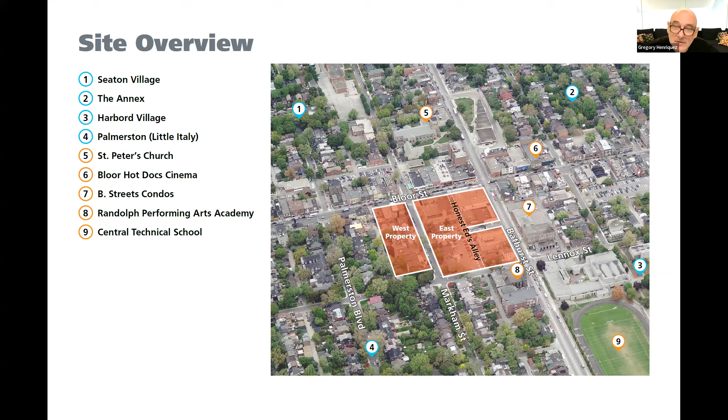Everyone on this slide probably knows the program is the corner of Bloor and Bathurst. It encompasses really 3 city blocks, with little fragments of holdouts - there's a little house on the edge of Lennox who decided they didn't want to sell, and then there's one little building in the middle of Bathurst between Lennox and Bloor Street who decided they didn't want to sell as well, and they were left out of the proposal, the project. The existing site has a history which runs deep within the community of Toronto.

It dates back 100 years, to the evolution of the Mirvish family's business, which became Honest Ed's over time, and evolved from a series of small houses to the sort of Las Vegas-looking signage you see behind you. He had passed away by the time we'd started the project, and I was lucky enough to go into his office.

And you go into his office, and it's a massive office with framed letters from every pope that has been around during his tenure running the business. It tells the story of an immigrant family who created this business for immigrants and for people who first came to Toronto to buy their wares. It was an affordable place for people to get things, and its story resonated with the community, and its loss was significant, but the reality of the retail situation in the world...

It had to go. It sits in a very interesting location between four different neighborhoods: the Annex, Seaton Village, Palmerston, and Harbord Village, and each had their own community organizations for us to deal with. It was a very grassroots process.

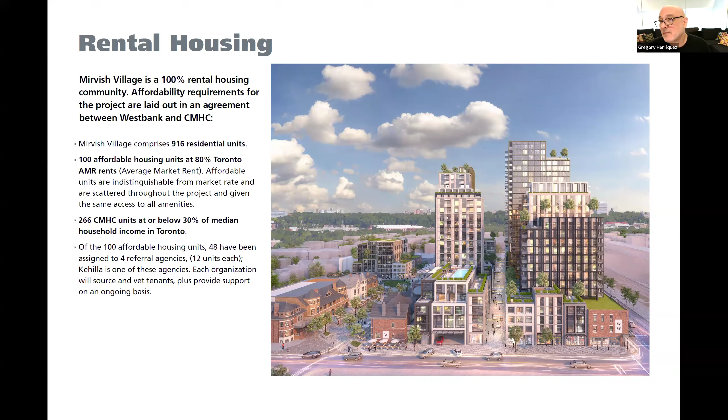Then over time, through CMHC financing, we were able to get 40% of the housing to be affordable housing, at different levels—one at 80% of AMR and others at 30% of the median household income. We're very proud to say that's probably the first time a developer put forward something like this in Toronto of their own volition.

The public consultation process involved not only going in and talking to people in the neighborhood in their homes and with community groups, it also had large public presentations, which we did. And Gregg Lintern was very complimentary, saying this is probably one of the most genuine engagements that has ever occurred in Toronto that he knows of.

And Mike Layton, a former councillor, was also very complimentary. I think the thing that I want to stress in terms of public consultation is that architects often have a design before they start public consultation, and the fault in that is that somehow you're trying to sell someone something.

Our philosophy, coming out of Vancouver, is to understand, as part of that work, what is it that makes this space special to people, and what are the things they need to maintain—things that can serve as metaphors or something to grasp onto that will allow everyone to make sense of this change in density.

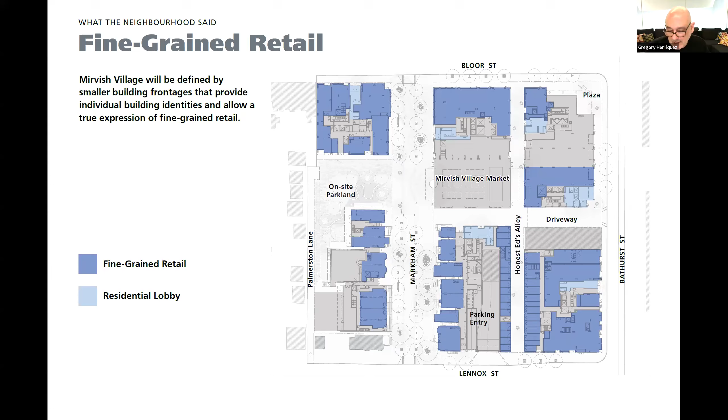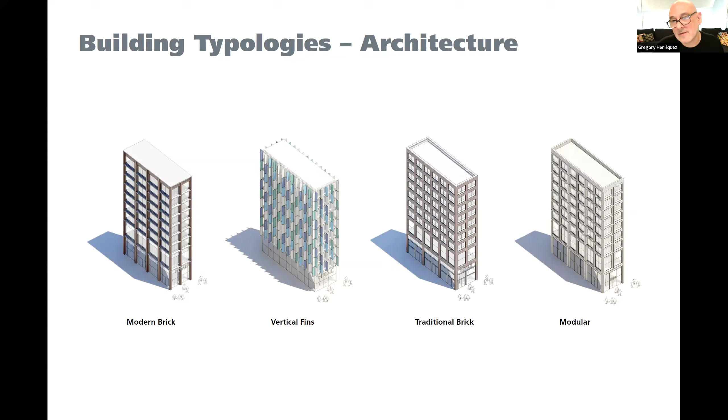We came up with this typological kit of parts where we make these little buildings and put them together to make larger buildings, and we started to work on the site. At the same time, we developed different architectural styles, because we figured if it was going to be like Tokyo—where you had all these little buildings happening over time on small sites—we had to do it all at once. So we had to create a whole bunch of typologies and develop our kit of parts.

I then went to my staff, who are used to doing 3D printing and fly-throughs and all sorts of things.

And I said, I don't want to do it this way. This time, I want to do it out of wood blocks. I just can't imagine designing this any other way. It took forever for them to make me these blocks, and we created these blocks, and everyone got to make their own little design. But the essential elements around it were the same. They were all made up of these same 33 little buildings that added up to 1 million square feet.

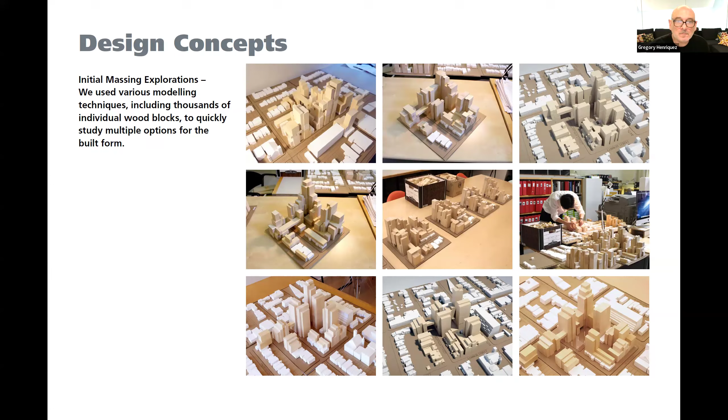How it ended up being shaped was the result of the confluence of how to get it approved, and the planners struggling with how do we deal with this kind of height in a place where our height limit was supposed to be 6 to 8 stories along Bloor and Bathurst Street.

The way we ended up rationalizing it is one of the principals in our office, Sean LaPointe, came to me. He says, there's this guideline within the Toronto bylaws that you need a 45-degree angle of daylight out of every single family house, when a larger development sits beside it. He says, you see a lot of these little steps in these little street wall buildings all over Toronto, and maybe we can apply it to this site.

So we cast these 45-degree angles all over from every house, and this is the shape and form of the density that resulted from the 45-degree angles. It also resulted in more density at the corner of Bloor and Bathurst, and the building stepped down.

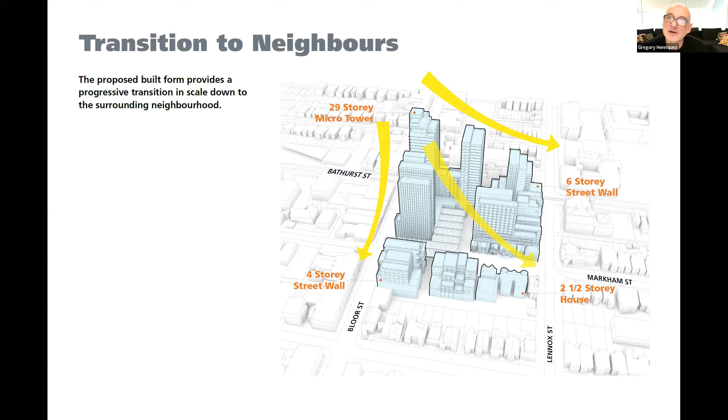What you see in front of you is really 5 or 6 large building blocks that are divided up into multiple building blocks, which becomes the little micro city which we developed.

This is one of the very first models we built afterwards, trying to make sense of it all with all the different typologies. This ended up being a little more density than we ended up getting in the end of the day, but it gives you an idea of the process we went through in order to design the project.

It's a direct result of the community's desire to have that intimate streetscape, and a trip that I took to Tokyo the day after I got the design brief as well. So there's the confluence of this local values and this experience I had, which the architect always brings their own story as well.

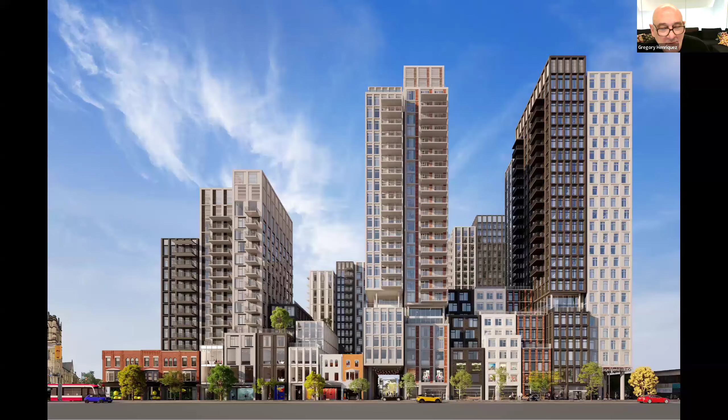And what happened over time is the project became very expensive to build. If you can imagine building 33 little buildings, all with different envelopes, all with different sort of aesthetics, it's very hard to imagine how it would turn out.

This is a view along Bathurst, sort of an elevational view. You can see the little heritage buildings on the left, a couple little stragglers in the middle. Actually, in the end, there was only one, but we left 2 facades, 2 buildings there.

What happened is we came to a point at which the budget wasn't working. And I said, well, why don't you let me try and do it the whole thing out of precast? So we met with Res and Global, because you have an incredible precast industry in Toronto that even ships to New York, and we don't have that in Vancouver.

I thought this would be fascinating. Maybe we can develop the kit of parts using only precast. So what you see in front of you now is the redesign of those typologies with precast elements only. The entire skins are done by Res and Global together, both of the two large precast companies, because neither of them could do the whole thing.

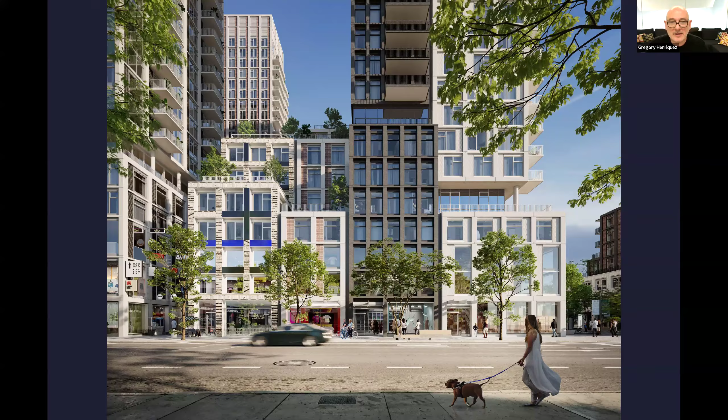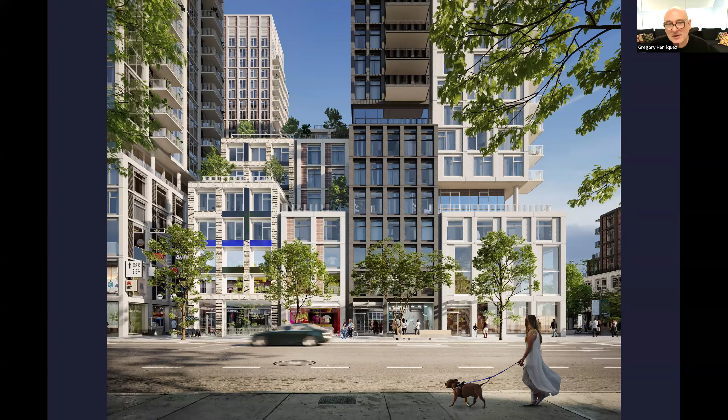In the end, what you get is a texture and scale which tries to emulate the idiosyncratic evolution of a street over time. While it is one project and there's no way you can get around that, we hope in the course of time, as the retails develop and it gets inhabited, you'll start to see a diversity to the experience along these streets. On the far left-hand side there's a little building that's a collaboration between us and Ian Wallace, who is a famous Vancouver artist.

The other part of the project, which was really special, had to do with the curation of the public realm. We have a very enlightened developer in Westbank, Ian Gillespie, who takes a lot of care and detail in the projects that we work on with him to make something that will be a unique retail experience, but also something which the community would be part of.

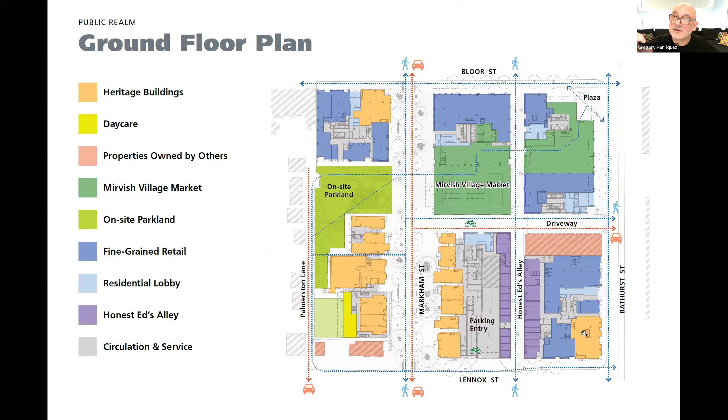We have an on-site park. We have all the little houses that are being saved and developed into little restaurants. And along both Bloor and Bathurst, there's small scale retail spaces, which you can see here. This is a view from above.

Part of the public realm concept is to remove the typical streets being pulled through in terms of the asphalt and concrete paving and sidewalks, and put small pavers, concrete pavers in different patterns like raindrops throughout the entire thing, and only allow traffic in one direction, one lane for drop off, making it really a pedestrian environment. So we have a mid-block connection through to Bathurst. We have a connection from Lennox going all the way up to Bloor Street, and Markham Street itself becomes spilling out with all sorts of retail and restaurants in the fullness of time.

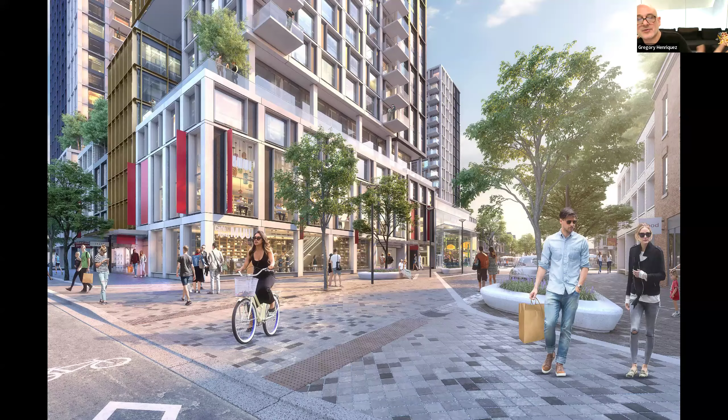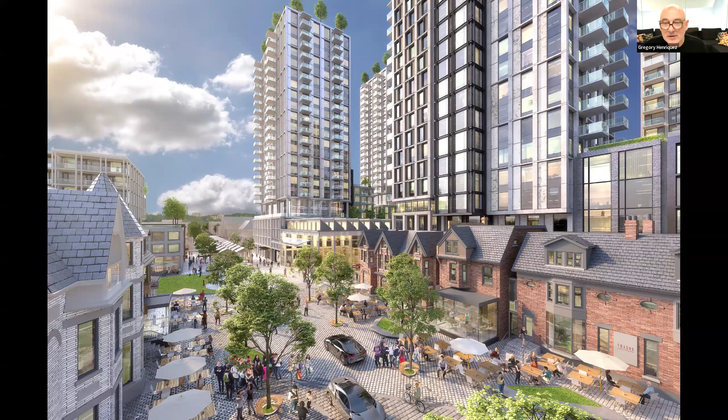So here you can see the entry in from Bloor Street coming down into that scale. There's a market that opens up for the performance venue in the middle. And then the smaller scale of the heritage buildings creates a real community-based streetscape with all sorts of smaller retail being able to spill out. Our office will actually be in the little black building, which you see on the middle right of the screen, which backs into Honest Ed's alley behind it.

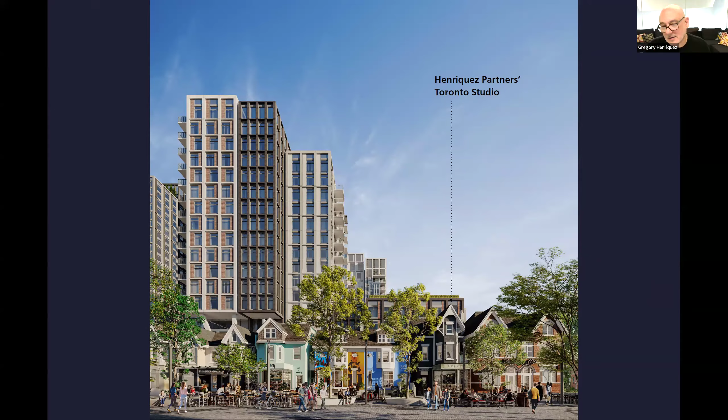Okay, our second project is 2444 Eglinton. It doesn't have a real name yet, I don't think, but eventually it'll get a name.

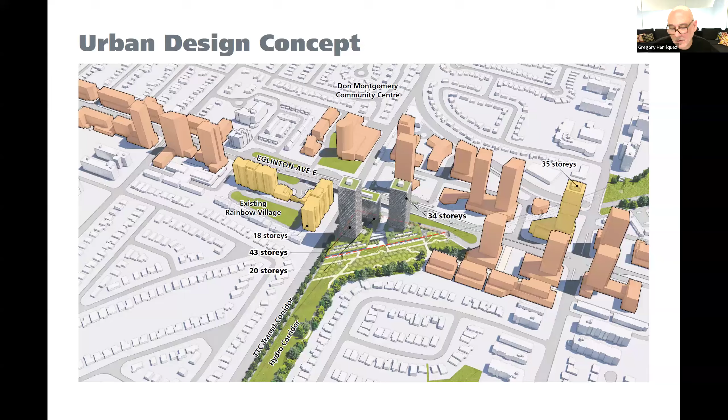We also saw that people were using the hydro corridor to move around, to get through the neighborhood, to connect from one place to another. If we could make this part of the urban planning concept and back retail and community facilities like daycares facing not only Kennedy Station but also onto the hydro corridor, maybe we could make something that could counterbalance the inhospitability, the difficult nature of the site.

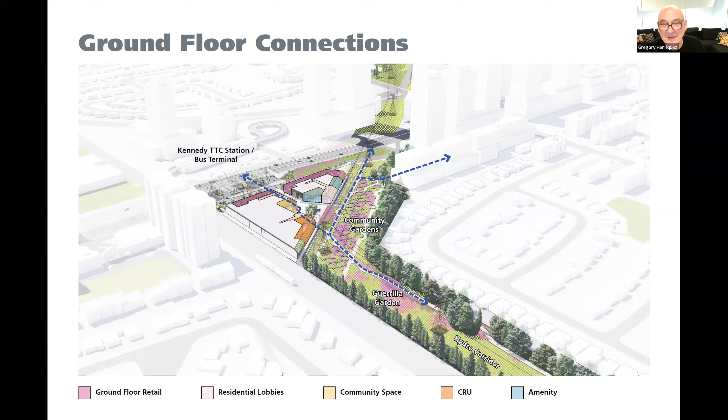So here you can see some of our design narrative sketches where we acknowledge the existing site and its challenges. We have to put the parking above grade for multiple reasons. One, the site itself is contaminated, and the cost to remove it and remediate it, given our program being a co-op housing project, is impossible.

But also, given the noise, smog, and congestion of the freeway and everything around it, you really want to elevate the housing up above Eglinton and above all of it. So putting the parking above grade made sense, then integrating it into the architecture of the greenway, folding up a metaphorical green landscape emerging out of the greenway, with the towers sitting on top, floating above — a towers-in-the-park concept.

You can see in the middle there's a connection through the site — the idea is building a road that would connect through the middle of the site to the greenway and make it part of an urban landscape.

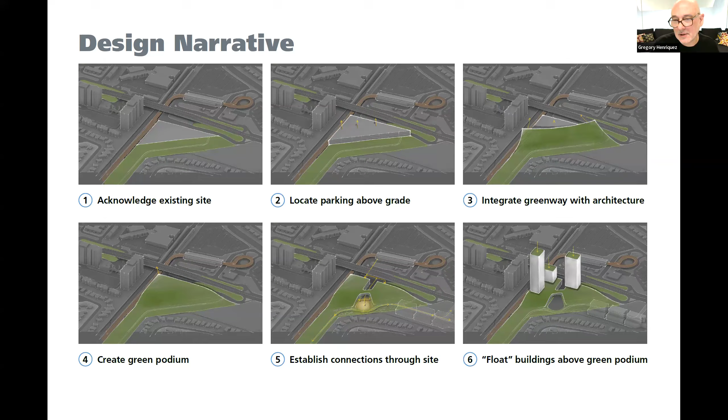Other people had worked on the site. You can see there's a project proposal by Zeidler on the top left-hand corner from 2021, which was taken to DRP, and they were told the site was inhospitable and undevelopable.

Our take on it, on the right, which was brought to the DRP, moved the massing around and made two big changes. One had to do with bringing the parking above grade and not having people live in the immediate vicinity of all the noise and chaos — bringing the smaller building toward Kennedy Station, closer to the scale of Rainbow Village, and pulling the larger building toward the hydro corridor. This gave two co-op buildings at 43 and 20 stories on one side, a street connecting through the middle, and a condo — which may become a rental project now — on the right-hand side.

And then, I just want to talk about one more thing. When we were doing the initial rezoning, we had to move very fast. We actually got this rezoning approved in about 68 days, which I think is a record for Toronto.

And we placed on the outside of the building this hexagonal skin, which was meant to provide a level of scale and detail, and wasn't meant to be a final design for the building. But the world sort of fell in love with it. Our client fell in love with the idea. Alex from the Globe and Mail fell in love with it, and people said, 'Are you gonna keep that?' And I said, 'Well, I never imagined that was the final design, but maybe it could be.'

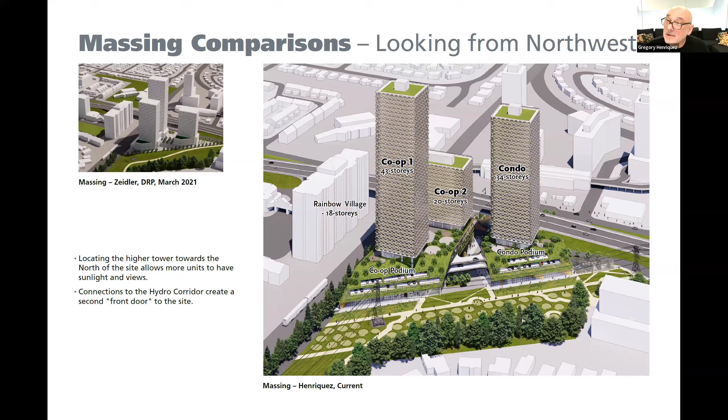So I went back and we thought, what can we do that would make sense of this project in terms of a design concept that would bring a layer of Ontario and local culture, but also keep the initial idea that everyone seems inspired about—this building emerging from the landscape. One of the problems with buildings of this scale is how inhospitable and scary they can become, sort of monoliths sitting out in the middle of nowhere.

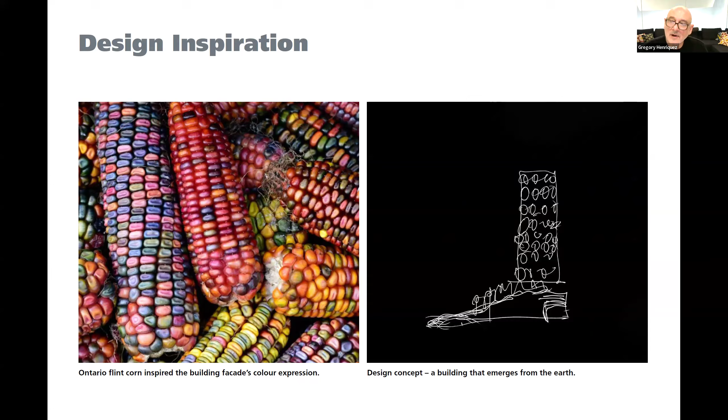There's no context, so we wanted to find a way to bring some joy to the building. We knew that because of our budget being $473 a square foot, we couldn't afford the beautiful lacy steel or aluminum framework we had originally put on the building for the rezoning. But we could afford some color, which we were doing on another project you'll see afterwards. And we could probably do it in precast, since precast is something we've gotten really good at with Mirvish Village. If we could make it even more affordable through repetition, maybe we could find a beautiful solution that everyone would like.

So we decided that these precast buildings, with their octagonal shapes, needed some color—like with the flint corn—in order for them to feel approachable and not frightening, brutalist objects. We tried putting the color everywhere, and it became sort of silly. We tried a whole bunch of different options.

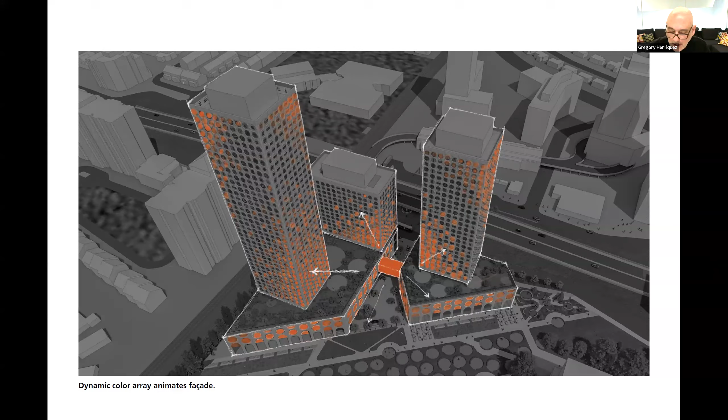But what we realized is that the public realm is where the color really needs to be, and it can spill up, exploding out of the middle of the site around the building, as a way in which to distribute it.

So what you see here is the beginning of some explorations on how to place the color within this precast framework. This is a view from the hydro corridor, where we're proposing to plant it with corn in these giant crop circles, referencing the flint corn. You can see this daycare on the left that would spill out, and restaurants that would spill onto a cafe, onto the hydro corridor, as well as the street that would connect back in on the other side.

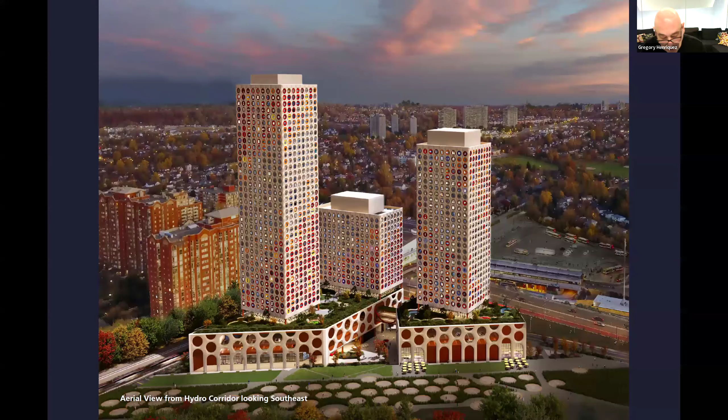This is an enormous project. It has 918 units—a third of them are affordable co-op rentals, a third are co-op market rentals, and a third are either market rental or condos depending on the market. What's amazing is it also meets the One Planet Living guidelines in terms of sustainability, as well as Toronto Green Standards Tier 2.

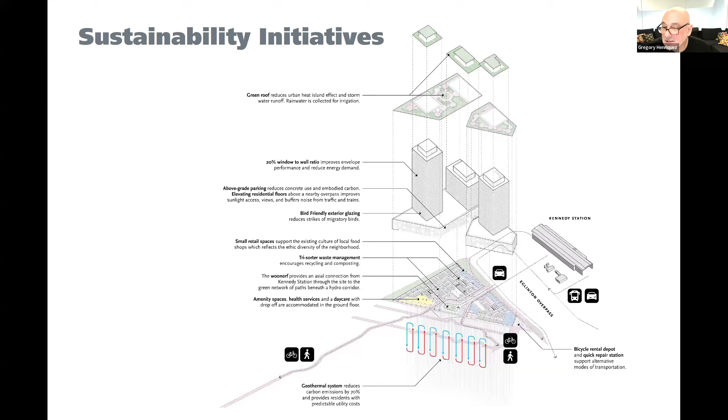Some interesting things we're doing: we're using a geothermal system, which reduces carbon emissions by up to 70%. We have all sorts of incredible sustainability built into the building itself, but the biggest one has to do with the window-to-wall ratio being about 20%—the lowest we've ever done in our practice. We also have green roofs with a lot of outdoor space, and fabulous amenities including daycare on the site.

And the final project I'm going to talk about is 5207 Dundas, which they've named Stella—I'm not really sure why, but that's the name if you want to look it up. It was a competition we were hired for by Tricon Kilmer, a developer, on another Create-TO site. The other Create-TO site had developers Civic and Windmill, and the developers on this one with Create-TO are Tricon and Kilmer.

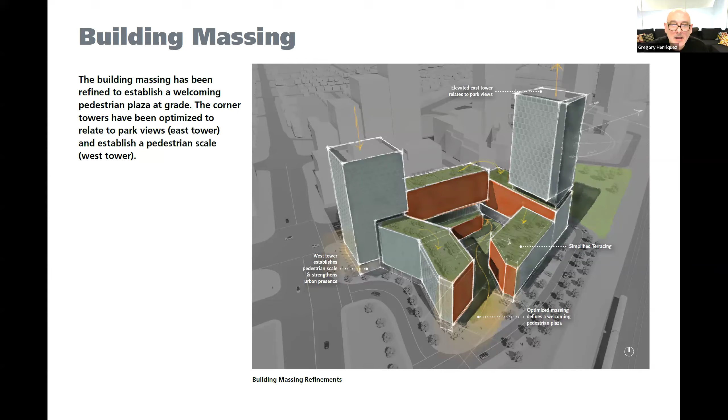The metaphor we came up with had to do with the honeybee. We thought if we somehow could create this hive in the middle of this courtyard, there would be this center of activity. We were working with Ladia Smoke, an Indigenous architect, to talk about the landscape and what we can do with Indigenous planting, making it part of the story of Etobicoke. She said one of the things we need to do is bring back flora that bees want, so that we create a garden again.

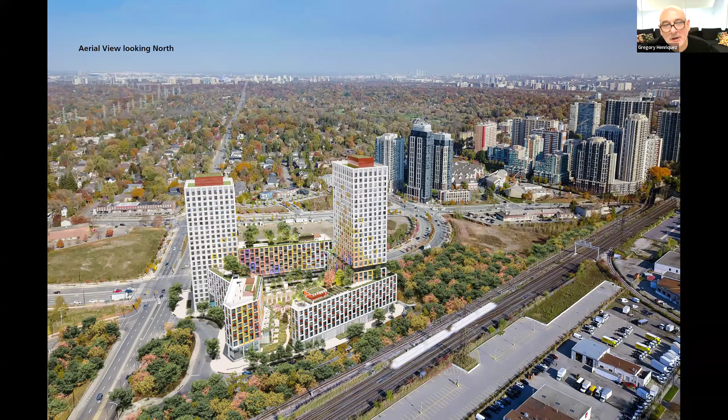So you can see a view from above. Looking back, the future buildings have yet to be built in this aerial photograph rendering, but you can see our building, where we have in the middle this connection going through the site, and the tower sitting up top, and a lot of repetition in the precast as well on this one to make it affordable.

And as you come down, you get a little closer. All the rooftops are inhabited. We're even going to be putting a basketball hoop on one of them, which is amazing.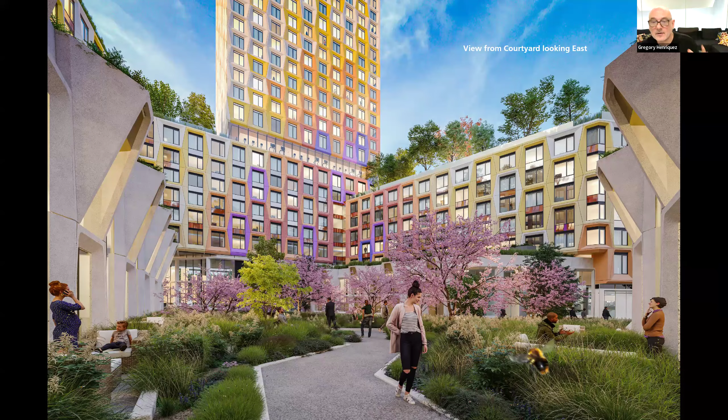Here's a view inside the interior courtyard. You can see these sort of very 1960s precast honeycomb-looking elements, which are the townhouses, and the buildings emerging up above. The tower gets a tiny little bit of color, but all the color is really reserved for the inside of the courtyard, so it'll be something people discover.

And here's a view from above St. Albans Road, up in the air, and you can see our metaphorical honeybee returning to the site, in the hopes that this project will bring back some humanity and scale and lives and body heat to this part of the world.

So in closing, before I open it up for questions - I've gone very fast over all of these, and I'm happy to answer any questions - I've tried to lean into the things that allowed these projects to be unique. The things that inspired us to make decisions about the tectonic expression, and allowed the projects to be something other than something you might see over and over again. They're unique places in the world. And with that, I'll open it up for questions.

Thanks so much, Gregory, that was really interesting. And I'm glad you came back to this slide. I have a couple of questions, but one specifically, I've never actually heard an architect talk about poetry. And when I think about a beloved poem, it always makes me feel a certain kind of way. So I'm curious, and you can maybe touch on it for each of these three projects, what's the feeling that you want your buildings to evoke, or the poetry? Maybe you can explain it in your own language about what poetry of a building means to you.

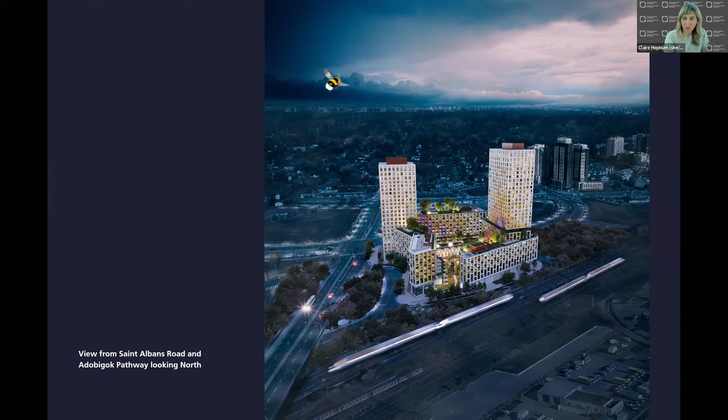We have a thoughtful comment question from Craig. He says, thank you very much, Gregory, beautiful work and great explanation about the constraints. For Mirvish, you essentially had the opportunity to build a master plan carrying 33 sites. In retrospect, do you think it would be strengthened by including 33 different architects? Wow, it's a lot. Your design seems to be striving for this degree of pluralism. He's not saying this as a critique, but as a comment we all struggle with.

Oh, for sure. If we had time for 33 different architects to do each building, it would be great. I'd love to try it. We have one project where the client originally started off with 3 or 4 different architects, us being one of them. One architect, Gensler, was going to do the retail. Another architect was going to do another piece, and we were going to do the residential component. And little by little, it whittled down to just us being the design architect for the entire site with all the buildings. It seems that the need to move quickly and get things approved sometimes takes precedence over the complexity that would come from multiple architects being involved. So I would love to do something like that.

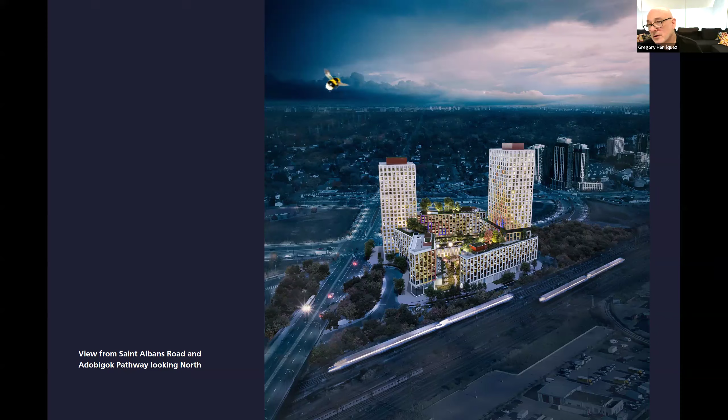I'll show you, go back and we'll go to it. This will be the largest co-op in a generation, right? Which is enormous. You can see we've taken liberties with the underpass here—we still have to deal with Metrolinx to try and clean it up so the connection across doesn't look anything like this now, as you can imagine.

Yeah. I'm shocked that the Annex consultation didn't involve a lot of animosity. It must have been well managed by the city. That's all I can think of.

We went into people's homes and had community meetings, and we didn't design it until we met with them. There was an interesting demographic in the leadership of a lot of these communities—a lot of university professors, left-leaning sort of values. And at the time, no one was proposing rental housing in Toronto. There were only condominiums, so this was really the first public offering of a major rental housing project in Toronto.